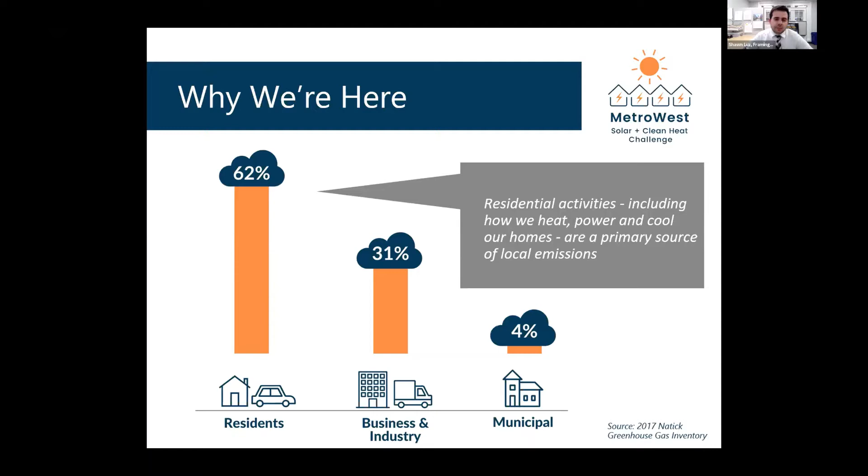As you may have guessed, an important way to do this is to change how we heat, cool, and power our homes and businesses. So with technologies like solar panels, which can convert sunlight into electricity, as well as air source and ground source heat pumps, which provide extremely efficient ways to heat and cool our homes and businesses across and throughout the seasons. These are our major clean energy tools that we can rely on.

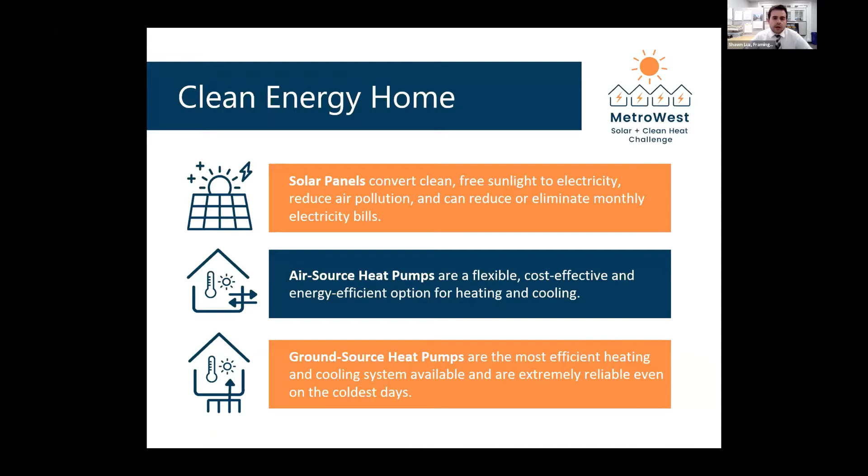But of course, making that transition to these technologies can be overwhelming, and there can be a lot to learn and consider for a home or business owner interested in taking the next steps, whether it's to install a solar energy system or install an air or ground source heat pump.

Our goal with this program is to address some of these major challenges. For one, the communities, we see this as more than just an isolated issue that any of us are facing. We wanted to take a regional approach to promoting clean energy technologies. Also, as a community-based initiative, we wanted to leverage these resources that we have through the program to engage and educate members of our communities about how clean energy can benefit them, not only in providing cost savings, but also making their home more comfortable.

To provide the most helpful program, we also wanted to build off of successful practices established by the state. We're thinking of programs like the Mass Clean Energy Center's Solarize program, which you may be familiar with. And of course, we also want to be able to empower you with competitively selected options for clean energy technologies that include discounted pricing for solar and heat pumps.

We're happy to finally launch the program. And regarding this point, we're also excited about the possibility to offer program pricing that is cheaper than average costs, while recognizing that there are different types of systems, and each system, whether it's a solar energy system or a heat pump system, is different across a project. It could be a different type of system, different sizing, and different specifics.

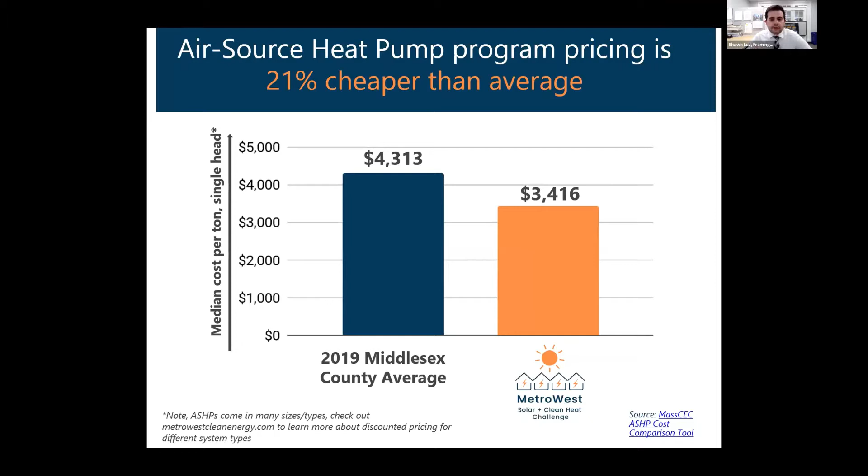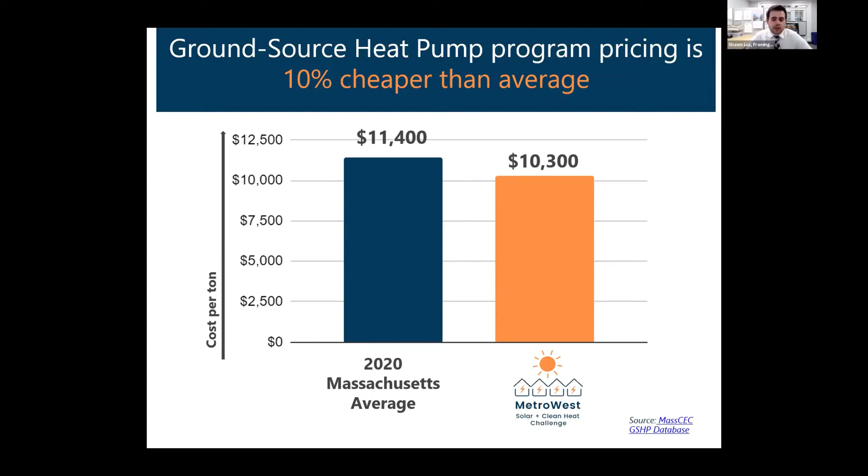Discounts extend to air source heat pumps. Shown here is the cost per ton for the Metrowest Solar and Clean Heat Challenge compared to the average for Middlesex County in 2019. Additionally, ground source heat pumps offered through the program also compare favorably to Massachusetts average costs, data that we got through the Mass CEC. So all this is to say that, while we welcome you to seek additional pricing, we believe that the program offers a competitive option to implement solar and heat pump projects.

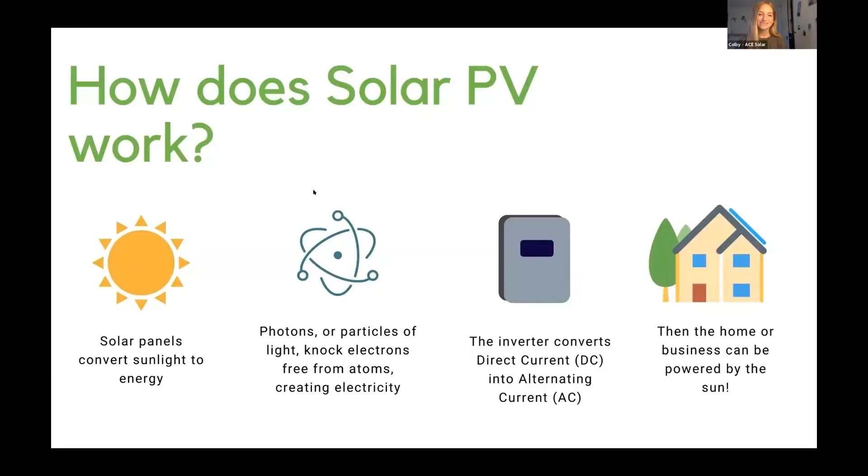And what we are offering for this program, we have heavily discounted pricing for both solar and batteries. And we really customize every project to your needs. For this program specifically, we have 2 different types of panels. Again, it's very custom to what you need.

So most people think of solar going on top of your roof. But if that doesn't work for you, maybe your roof's really old or it doesn't get enough sunlight, we can also do ground mount systems as well.

Yeah, absolutely, I'll chime in there as well. To Colby's point, it's a very customized approach. So it's tough to put a number on the discount, but roughly in the ballpark of 20% savings compared to our standard offerings. So a really big opportunity to take advantage of that.

And also bridging on that point, ground mount as well. I personally always like to see the fun projects come together, so non-traditional things like carports or pergolas. We can also help out with that, working with other construction partners and contractors for the structure side of things.

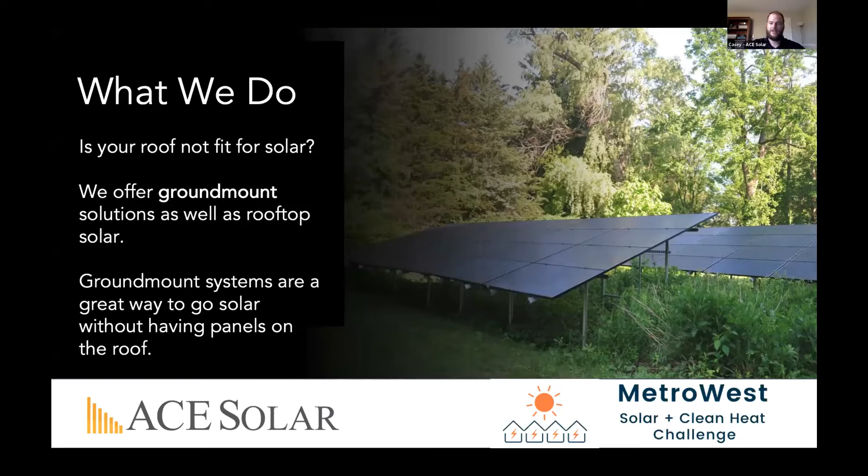Turn it over to Colby for a little bit about the incentives. Yeah, so it really is a great time to go solar. There are a lot of financial benefits to it, and they can be limited. So for the federal ITC, you can claim up to 26% of the cost of your installation. But that is this year, and it does step down, I think, to 22% next year.

So this year, if you were considering solar, you would be saving a lot of money doing it in time for that great program. And then Massachusetts has something called the SMART program, and this is a really incredible way to increase your savings even more with solar. It can pay you for 10 years for the energy that you produce. And there are also great financing options, so we have low interest solar loans. You can actually go solar for $0 down and start saving right away.

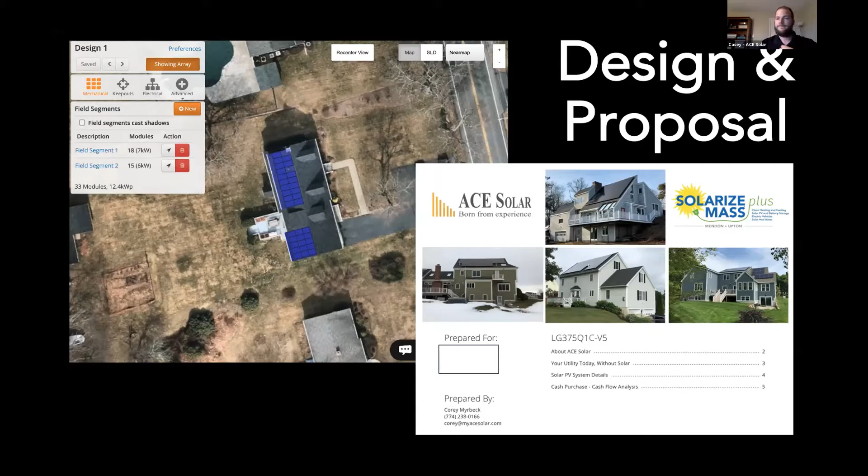Jumping back a little bit to the timeline for things. As Colby mentioned, we'll start with the proposal. Typically within a week, we can turn that around and then have a conversation, customizing as needed.

From there, if you're interested, we sign a contract, a small deposit, or in the case of a loan, just validation that the loan's moving forward. From there, we would start with that site visit to confirm all the measurements, take care of engineering, design, and then on to permitting and reaching out to the towns for approval and permission to build these systems, as well as the utility companies to get an interconnection agreement.

All said and done, the installation can be done after permitting, from maybe 1 to 2 days, depending on the complexity of things. I've seen it done in as little as 1 day for a smaller system, and that's on the shorter side.

After that, a little bit of closing out as well. So we wrap up with the inspections, work with the utility company to install the smart meters or any other equipment that needs to be installed, and then close out that project, providing everyone with a digital binder that has all of your system documents, warranty information, tax information, all of the above. From there, once we close out with the utility, you'll get that permission to turn on, flip the switch, and you're running on clean energy.

As far as how our pricing works for this program, on average you're going to see a 15% discount, but every home is different. What we need to let you know is you'll always get a firm price, because you may need something done with your electrical panel, or you may not. Whatever it may be that you need or want, we will price individually for you.

I have some pricing packages I'll go through in the next few slides. Those represent real world jobs, and each had an example of something that added to the cost, because every person who submitted a proposal to be part of this program has to bid against something that's pretty stock. So this gives an example of some of the things we see out there.

But you know, our name is New England Ductless, but if you peruse the LG or Mitsubishi or Fujitsu websites, you're going to see there are ducted components, and we offer those. We also offer traditional heat pumps through this program. So if you have a home with ductwork, or you're not too keen on some of the things we've shown here, there is no other product on the market with the versatility of the ductless product, and it's a great solution.

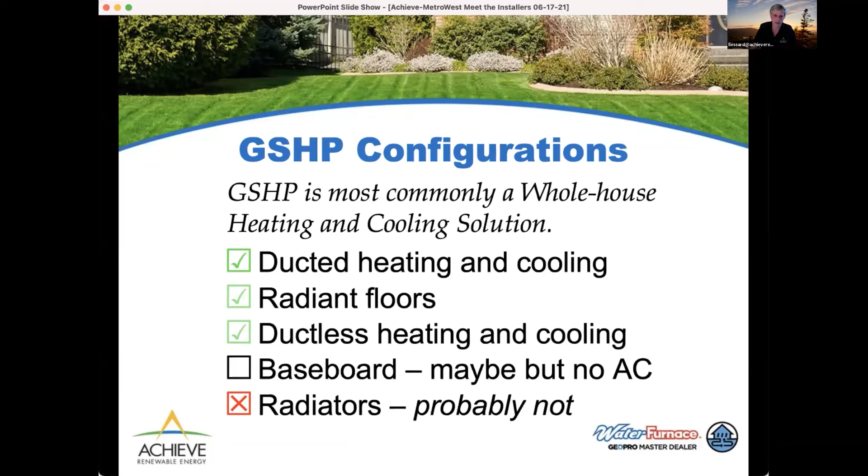Ground source heat pump systems are typically whole-house heating and cooling solutions. We're much less likely to address just part of a house than New England Ductless would be with their equipment. The heating and/or cooling is distributed a variety of ways, most commonly through ducting, but radiant flooring is also very compatible with ground source heat pumps. We have ductless ground source heat pumps too, with similar wall mount, console mount, and ceiling mount devices to what Joe described earlier. Baseboard is possible under certain circumstances but doesn't provide air conditioning, and steam radiators are unlikely to be compatible with a ground source installation.

The first thing you need to know about ground source is that there's no volcano needed. The type of geothermal energy use you see in Iceland or on the Discovery Channel is direct use geothermal, where groundwater is so hot it can be used directly, or steam can be accessed through drilling. What we do is a geo-exchange, moving heat from the moderate temperature earth into the house during the heating season, and from the house into the ground during the cooling season.

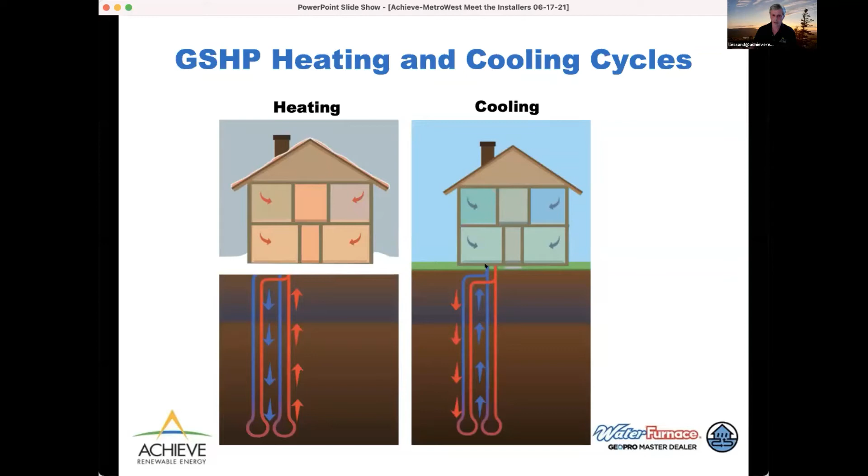So, no volcano. The system works this way: on the left we have a diagram showing the heating cycle, where in the vertical closed loop depicted here, we're cycling antifreeze through the ground. It comes up out of the ground warm, heat is extracted from it and put into the house, and then it returns colder. As it travels down and exchanges with the bedrock, it rewarms, and the cycle repeats. In the cooling season, we take heat from inside the house and inject it into the ground through the closed loop system, then use the cooler antifreeze coming back from the ground after the exchange happens. Again, the cycle repeats.

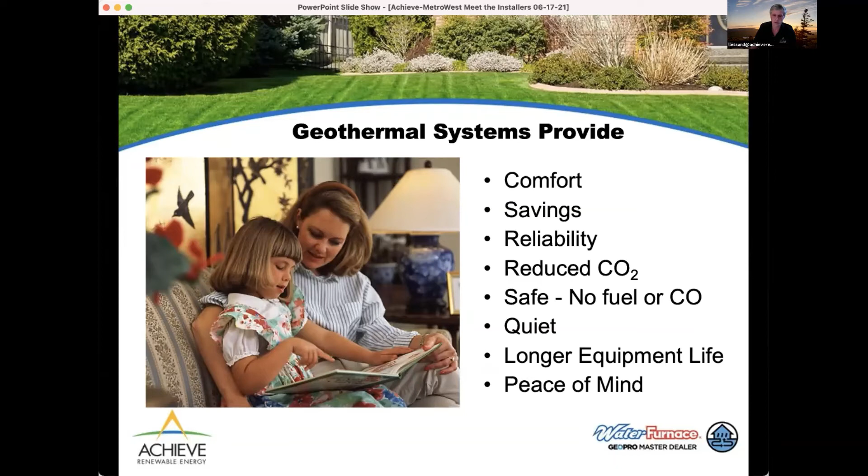This slide shows some of the general benefits of ground source heat pump systems. They're very comfortable, providing even heating and cooling. The operational cost is much lower than fossil fuel options. They're very reliable and have a long service life because they aren't exposed to the outside elements or have wear and tear from combustion of fossil fuels. The efficiency of these systems can dramatically reduce your carbon dioxide or other greenhouse gas emissions, and eliminating the use of fossil fuel combustion removes the threat of carbon monoxide poisoning from the heating and cooling source. The systems are also very quiet, and all of that can provide peace of mind.

Building on what Joe explained about air source heat pumps, ground source heat pumps move or extract heat from the ground during the heating season. So one unit of electricity is used to operate the equipment, not to make the heat, but to move the heat. That way it can harvest four units of free energy from the earth to be delivered to the house.

The way heat pumps work, the waste heat from running the equipment always dumps to the hot side. So that helps you in the heating season and holds you back just slightly during the cooling season, though ground source heat pumps are incredibly efficient at cooling as well.

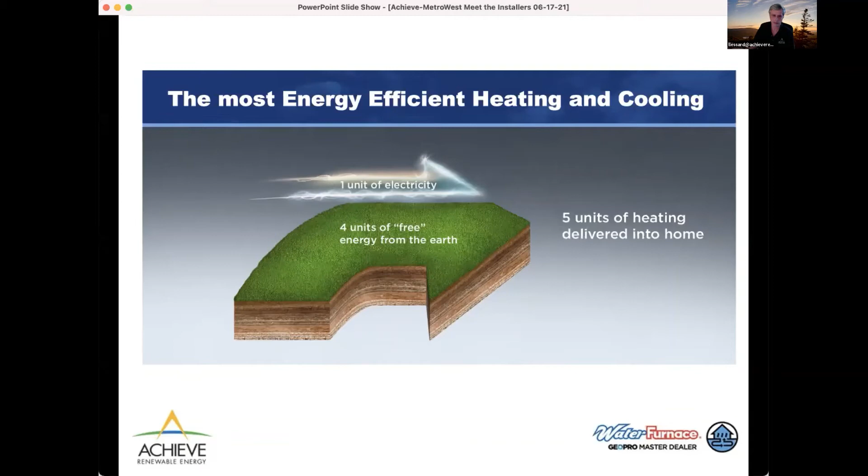Thinking about how systems work, if you have Joe's toaster example or an electric hot water heater, and you put a kilowatt of power into that, you're going to get a kilowatt of thermal energy. Heating equipment is rated on a coefficient of performance, a ratio of what you get out versus what you put in. In this case, you get out exactly what you put in, so you end up with a COP of 1.

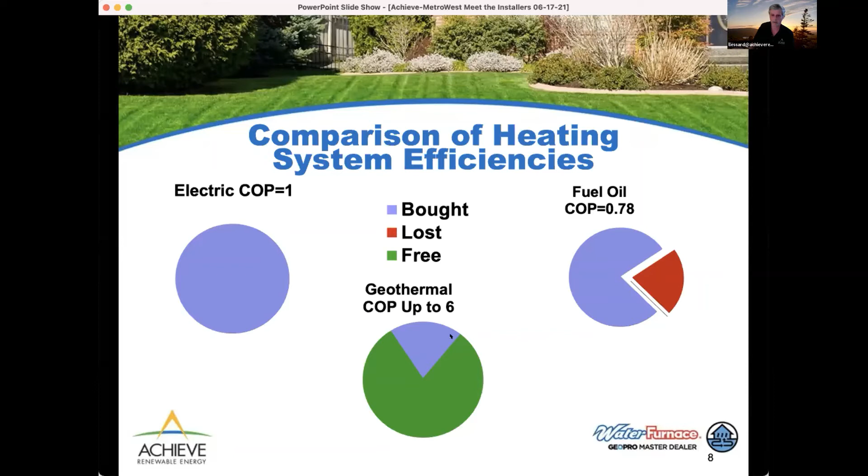With a fossil fuel system, no matter what you do, some of the heat is lost up the flue with the combustion gases. So if you have a 78% efficient fuel oil system, maybe 1970s or early 1980s vintage, you only get 78% of the heat and lose the other 22% up the flue. It's the opposite situation with a ground source heat pump, where you're paying for the operation of the equipment, but it's harvesting heat from the ground, so you get to use the entire pie to heat your home.

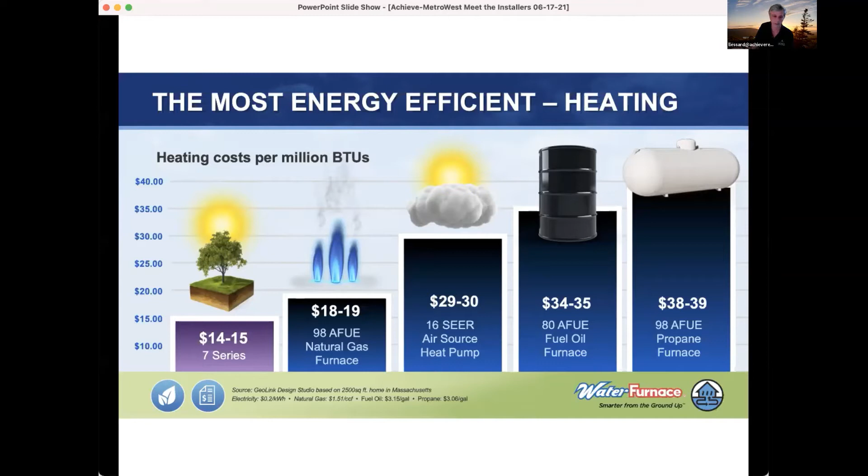Greenhouse gas emissions are lowest with ground source heat pumps, even lower than natural gas, and quite a bit lower than propane and fuel oil. Electric resistance is about the worst way to go if you're trying to keep greenhouse gas emissions low. Now, these numbers are with grid tied electricity. If you either buy renewable energy through a contract or have solar panels, ground source heat pump carbon emissions can go as low as zero, and that's also true for air source heat pumps.

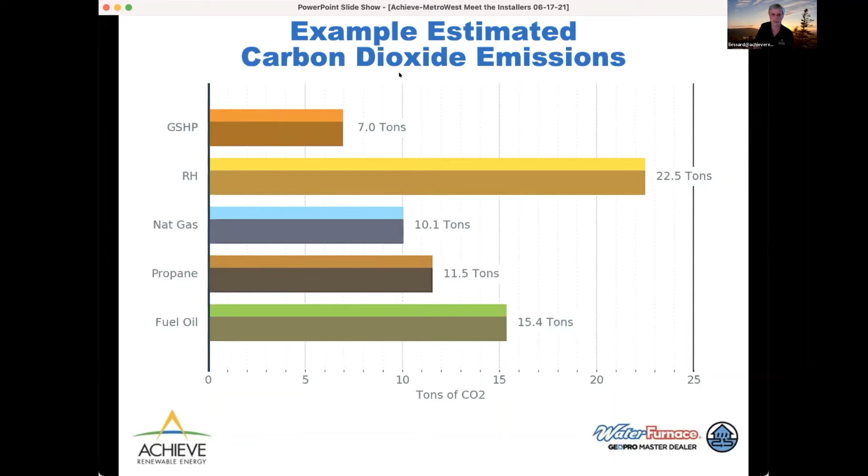There are a variety of benefits to this equipment: it's a friendly renewable energy source with really high efficiencies available for both heating and cooling. That can result in very high savings on operational cost and reduced carbon footprint. The equipment is also installed without PVC or ozone depleting refrigerants and all of that.

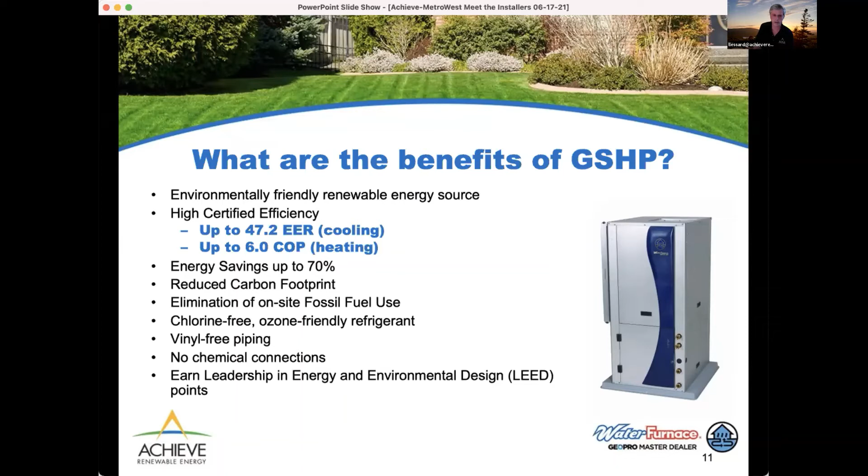So that's all beneficial. Now, as far as how the equipment looks, form follows function. In the center here we have four ducted ground source heat pump units of various model lines, and they look like a residential furnace. The geothermal magic happens down in the bottom section, and there's an air handler packaged into the same box. These can be split apart, or you can buy a configuration where they're already split apart.

Here's one of the geothermal split units, where the air handler can be remote. We also have units that make hot water, which can be used for domestic hot water, radiant flooring, or potentially, under the right circumstances, baseboards. Those have the general form of a boiler.

The underground components have a variety of different options available. The two on the left are more popular in areas with bigger lot sizes, where the regulations for using a pond are different than they are in Massachusetts.

The two on the right are the most common installations: either a vertical closed loop, which accounts for maybe 70% of installations, or a groundwater-based system using a well, shown in the bottom right. Horizontal loops, upper left, are possible in Massachusetts, but digging here is expensive and lot sizes are small, so they make up 10% or less of installations.

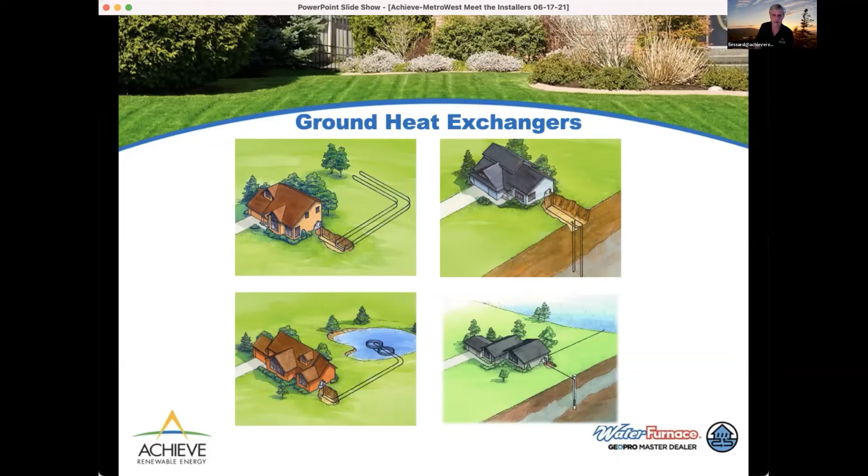As with the other contractors, we have special pricing for the Metrowest Challenge. We were selected via competitive bidding, and we bid special configurations presented to be representative of installations at typical homes.

We have different model lines of equipment to meet the different sizes of homes and provide different options. There are price modifiers that allow changes to that base system price based on extra features people might want, or sometimes reductions in cost based on the size of a home or something similar. All this information is publicly accessible.

Most of our projects do use modifiers for cost. Lots of people want multiple heating and cooling zones for their house, internet connectivity of the equipment, or they may just have a bigger home and need additional capacity. All of that can be handled in a very transparent way with the pricing we've provided.

Ground source heat pump installations are typically more expensive than air source heat pump installations, especially when we're dealing with a whole house solution compared to an air source solution that's only for part of the home. But there are very good financial incentives that make our installations cost competitive.